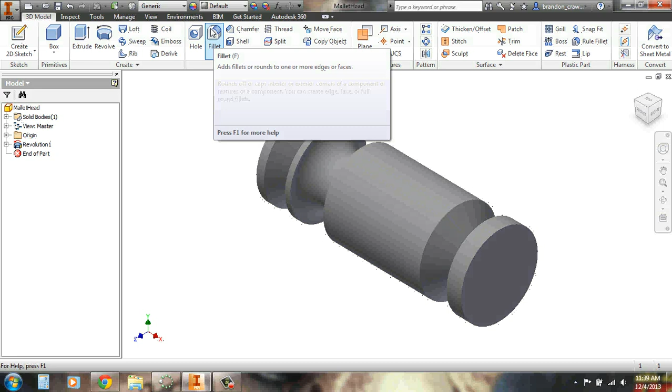Alright, the second step of making the mallet head would be addressing these really rough edges, since this is a toy for small children. So what we're going to do is apply a fillet, which makes this a nice rounded edge. When you click on it, you'll be able to select the edges, and it rounds off those edges.

Make sure you click the check mark. Now our mallet head is much better and safer for the kids to use, won't be as sharp.

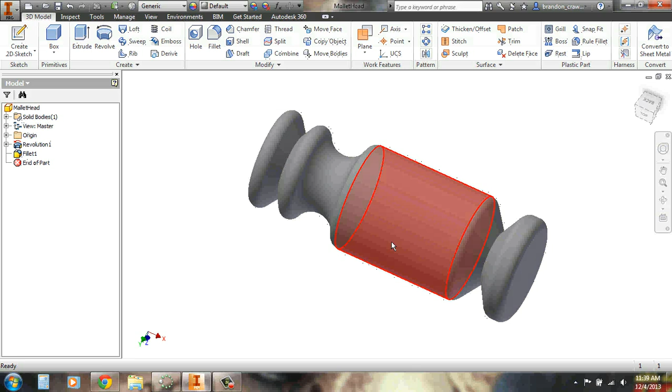Once that's done, we are going to create a hole in the side of this. Now you can't just make a new sketch on a cylinder, it has to be a flat surface. So the way we get around that is we are going to make a work plane.

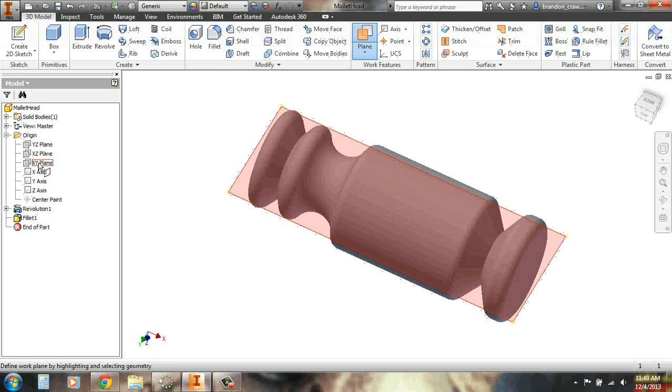Work planes are up here, we're going to click on plane. I don't need to click on the drop down, just right here at the top. Then I'm going to come over here to the origin. Now the YZ plane is at the end of the mallet, XZ is right there, XY is right there through the middle. So it doesn't really matter which one of these two I pick, just not this one.

Then I'm going to select the side of the cylinder. What that did now is gives me a work plane. Now I can right click, make a new sketch, and then I click on this plane. Now all of a sudden I have a plane that I can work on.

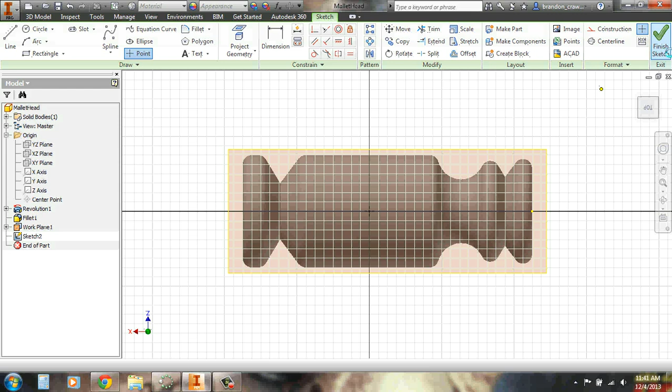I'm going to put the point somewhere close to the center because our mallet's going to be somewhat centered. All you have to do is pick a point, no dimensioning needed. I'm just going to put it right about there. It looks close to center, may be a little to the right, but somewhere close to the center. So now I've got a point.

So as simple as that, I made a plane, selected the XY, selected the side of the cylinder, right clicked, made a new sketch, and selected this plane, made a point. Now all I have to do is select hole, and it's already going to know that that point is where I want the hole. Now here's where I've got to decide how big I want the hole to be.

So how deep do I want it to be? 1 inch is probably max, depending on how big you made this. If you made it 1.5 inch, then 1 inch will be fine. I'm going to go 0.75 just because I don't think it needs to be down quite that far for a little toy handle for a hammer.

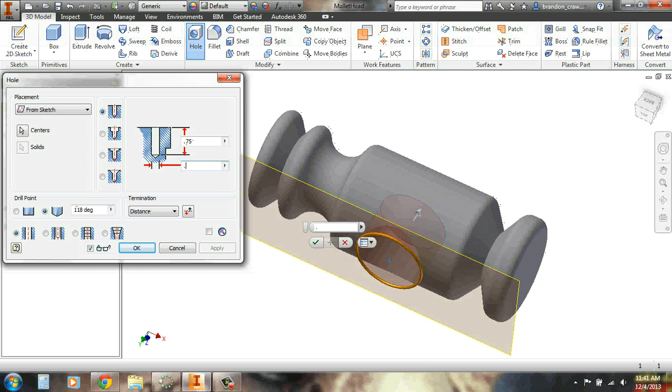And then how big I want it to be around. I probably want the handle to be around 1 inch, but I don't know, that may be a little big. So I'm going to backspace and make this 0.75. That's probably about right, so I'll say OK. Now I've got this hole.

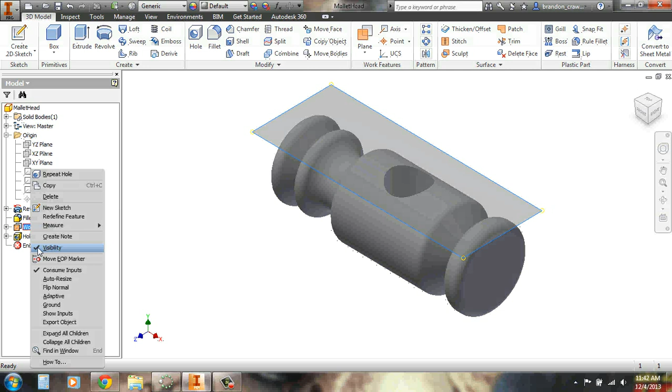It's even pointed at the end so that my mallet will fit in there easier. Now to get rid of that work plane so you don't see it, again go over here to work plane, right click and see how visibility is checked. We're going to turn visibility off.

Alright, last thing for the mallet head. The mallet could go in here and we could just glue it in, but we're going to make it a little fancier and make this a threaded hole. So we're going to click on thread up here. I'm going to click on the side, the side is where I want the threads to be, not at the bottom. I want the threads to be on the side.

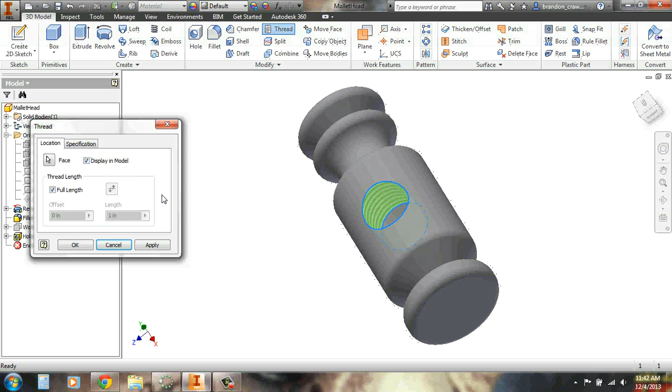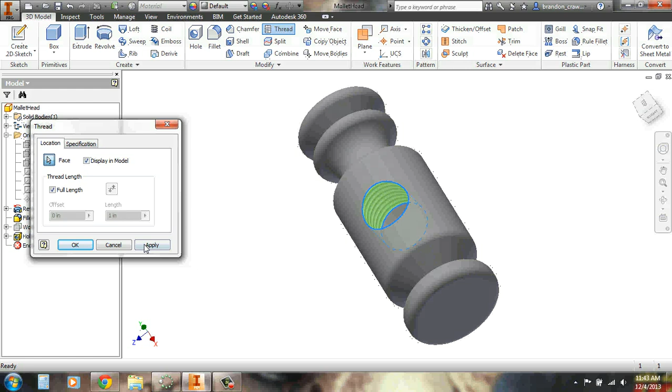Now over here is where I can choose the different types of threads. I can choose how big the thread is, what designation, what class. You don't need to worry about any of this, just the fact that it's located there. The specification will automatically come up 0.75, 3/4, when we do it on the handle as well. So that'll be fine, we'll just leave it there, apply it. Now our mallet head is complete, threaded, ready for the handle, which is the next step.

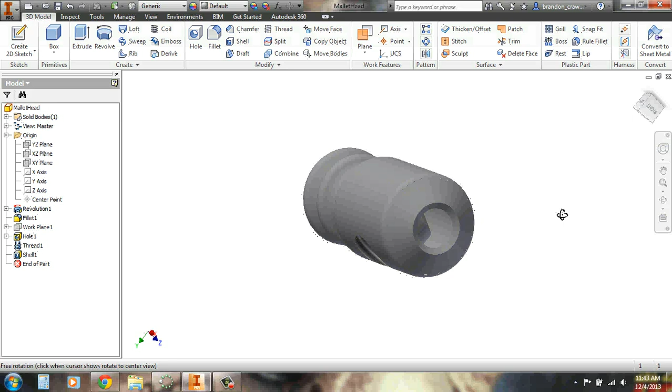The last things you can do, I did some fun things with my handle. You can come back in and do some shelling. Again, you don't have to, but if you shell this, what happens is now it's hollow on the inside. You can see it through that side. If I want to shell it on the other side, I can do that too.

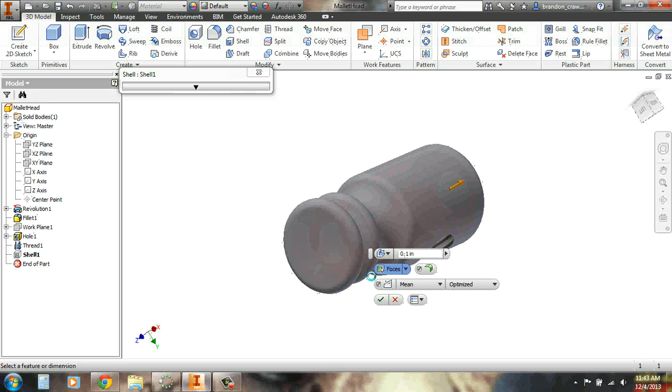Now, you might see an issue if I did that, which actually I'd have to do back here. Now if I shell that, there's an issue. Now it's not much of a hammer, it'd be tough to make those pegs go in with two big openings.

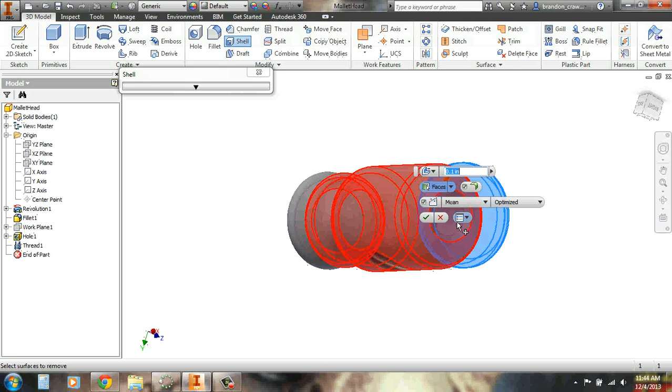So I'm going to go back to only having one side shelled. I'm going to delete this, reshell it, and shell it on the end, which is not going to be my best hammering side. And there we go. Now I've got it shelled out to where it's a little less weight. And we're done.